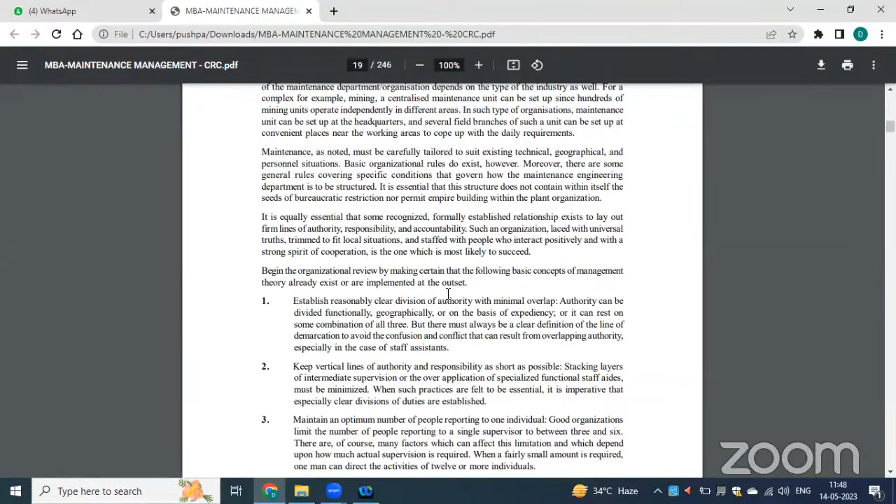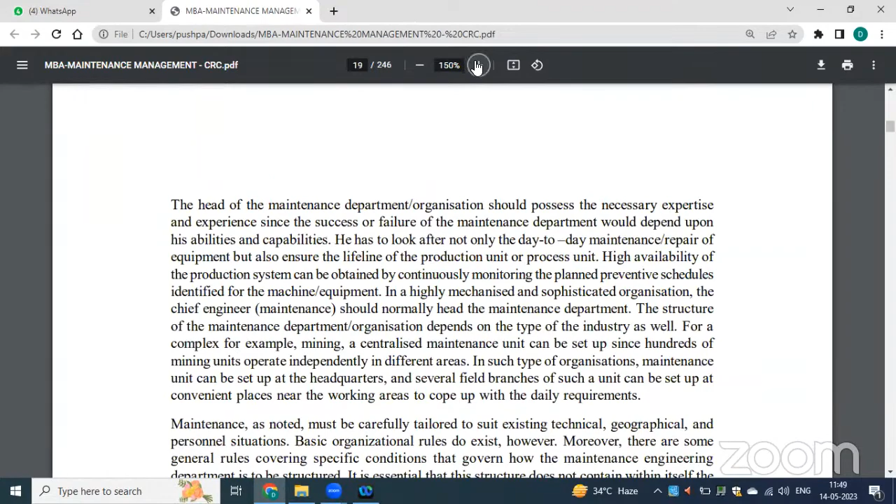So structure and strategies of maintenance management. Today we will discuss this, and we will see how the organizations are adopting this, how the organizations are taking this as a concerned area.

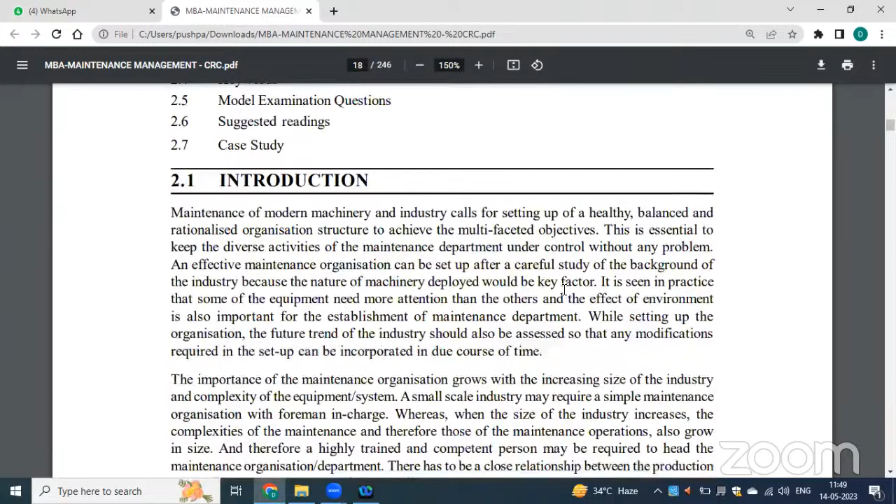Maintenance of modern machinery and industry calls for setting up a healthy, balanced, and rationalized organization structure to achieve the multifaceted objectives. Production management is also changing with the modern machinery. All machinery is being automated, and new types of technology are being introduced on a continuous basis in the organization.

So in this changing scenario, the organizations have to ensure there is a balance. They should ensure there are no breakdowns in the machinery maintenance, and they should ensure there is no hindrance in the production activity.

The importance of maintenance organization grows with the increase in complexity, when we see there are constant changes in the equipment. If you go with very traditional equipment, every month or every 15 days you grease it, you oil it, and there is no repair needed in that maintenance.

But when it is automated, we have to do the backup, we have to ensure it stays on, and we have to ensure there is no problem in the automation scenario. So it goes on a continuous basis.

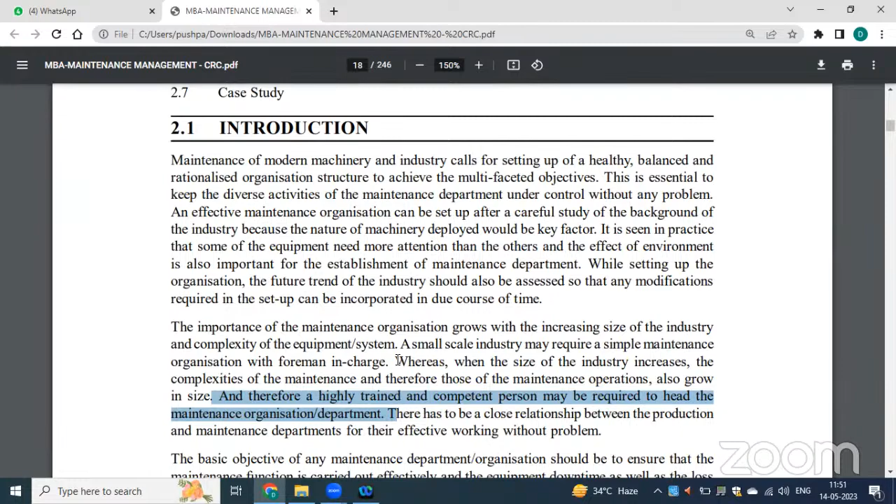So what is the basic objective? The basic objective is to ensure that the maintenance function is carried out effectively, and equipment downtime as well as loss of production is minimized. So what does downtime mean?

The machinery that has been shut down, the time involved for the machinery to be shut down - if the machinery is shut down, the production time will increase, and when production time increases, your cost will be affected.

So what is your objective? The objective is that you have to cut down the equipment downtime and increase the production capacity.

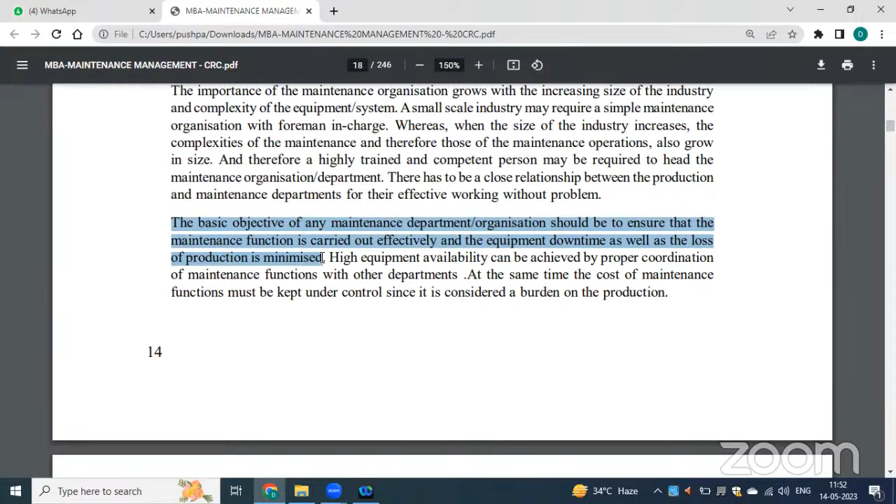So what are the requirements they look for to achieve this objective? The head of the maintenance department should always have an expertise, since the success or failure of the maintenance department depends on his abilities and capabilities. Whoever is more experienced will know when the machine will break down, when it will be under repair, and if it is under repair, how it can be recovered.

And what are the precautionary measures that have to be taken, how continuous monitoring has to be done, and how planned preventive schedules can reduce breakage in maintenance. So if we are servicing our vehicles every 15 days, it will run smoothly. These preventive schedules and monitoring can reduce repairs for any machine.

For example, he has specified mining here. A centralized maintenance unit can be set up since hundreds of mining units operate independently in different areas. We see that wherever mining operations are conducted in different areas, the whole operation is maintained at one headquarters, and the maintenance department coordinates with the daily requirements of each different area unit, successfully maintaining the operations.

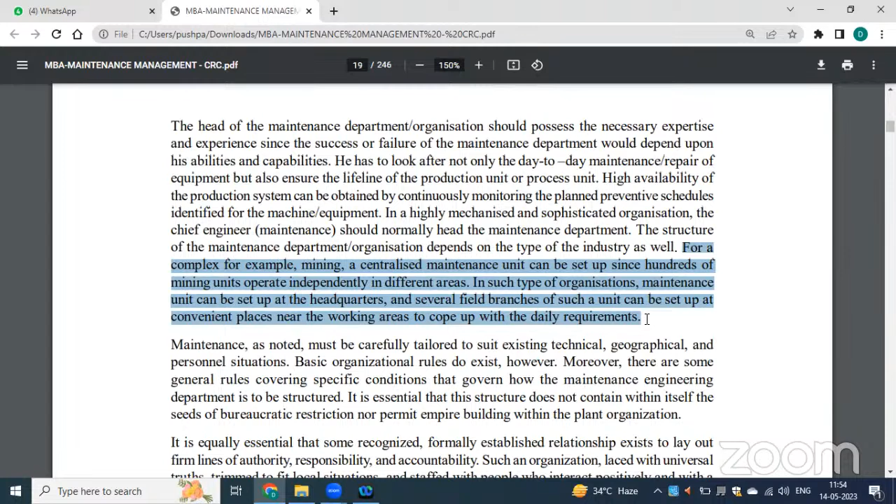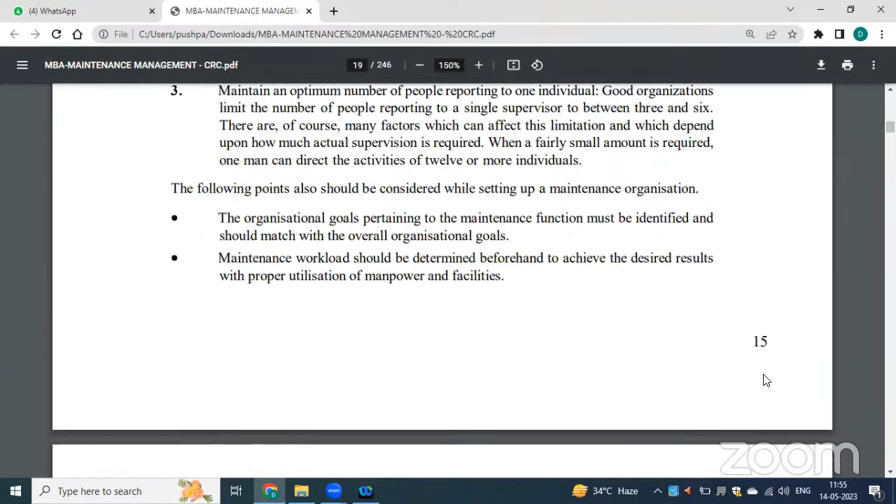Whenever the maintenance department is designing their strategy, every department has its own policies, its own procedures, its own goals. Every department tries to come out with the facilities that they are offering to each and every other department.

Coming to the maintenance organization, the organizational goals pertaining to the maintenance function must be identified and should match with overall organizational goals. So whenever they are trying to set up their goal, they have to match with the organizational goals. Suppose the organizational goal is to increase production capacity and double it within 6 months.

If that goal is there, the maintenance goal would be to ensure every month they go with repair, or coordinate with different departments to see how the machineries are running, what machineries have been down, how they have to be brought up, and how they have to be repaired. If your repairing schedule shows that a particular department's machinery comes for repair after 1 month or 15 days, that contradicts the organizational goal of doubling capacity in 6 months.

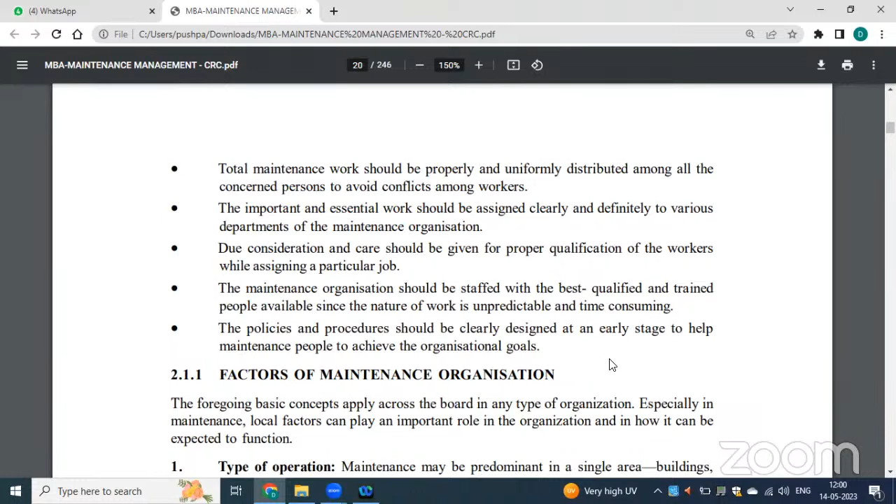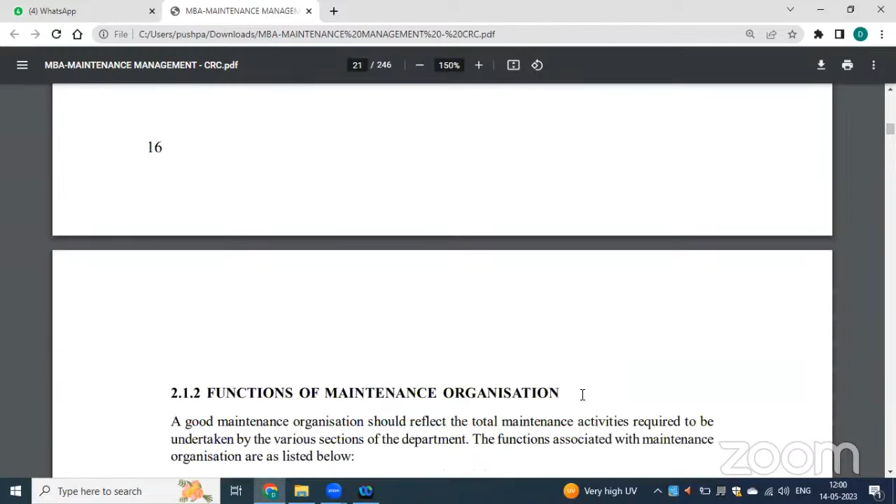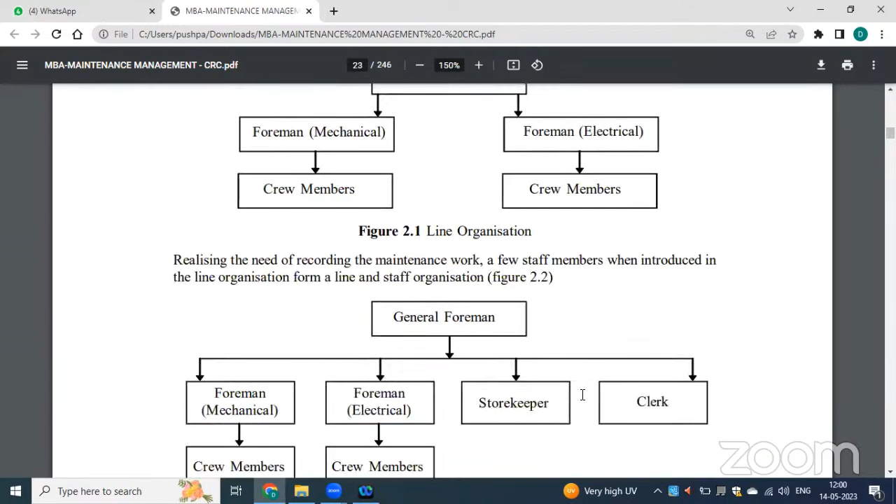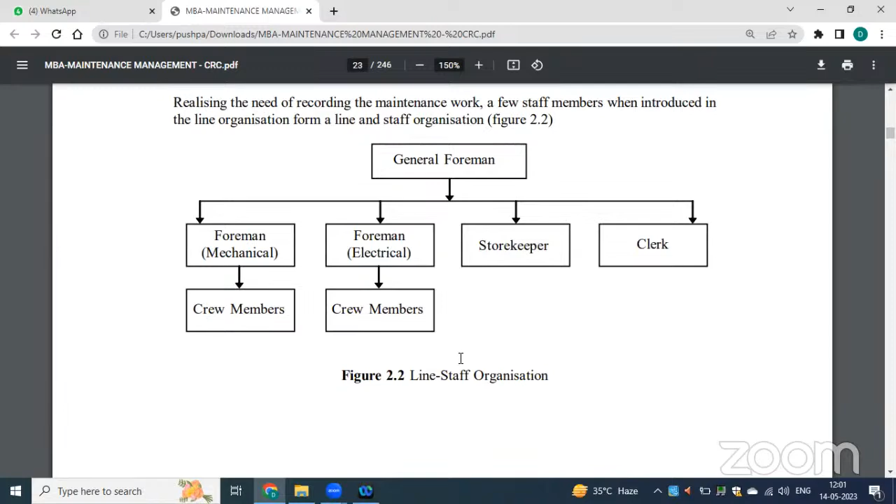Last class we discussed the structure of the maintenance organization. We have different types of structures: a line structure, and a line staff structure, wherein there will be supporting staff and a line function, with the supporting staff assisting it.

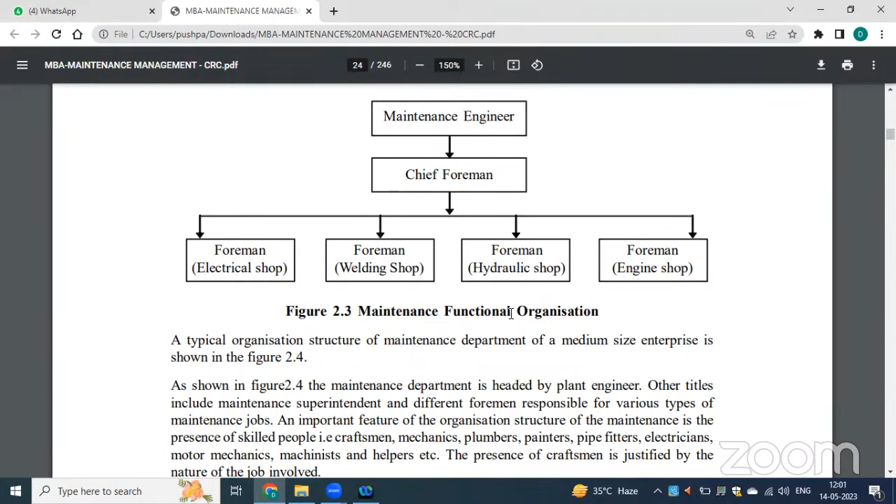Then we have seen the maintenance functional organization. Depending on the functions, like electrical functions, welding functions, hydraulic functions, engine shop, the maintenance organization is structured according to the different operations conducted in the organization.

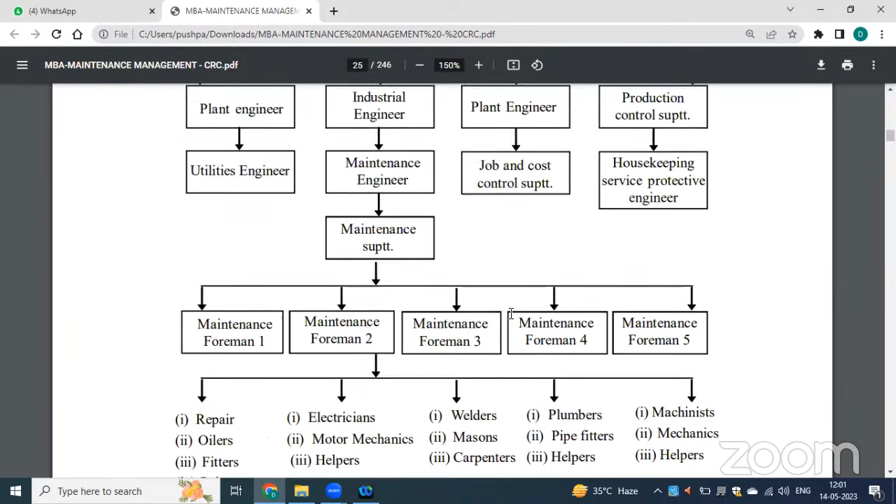Then we have seen, we have a works manager, a plant engineer, industrial engineer, production control superintendent, and a utilities engineer. These are the different designations in operations management. Under the maintenance superintendent, we have maintenance foreman one, foreman two, and foreman three, who organize the functions at different levels.

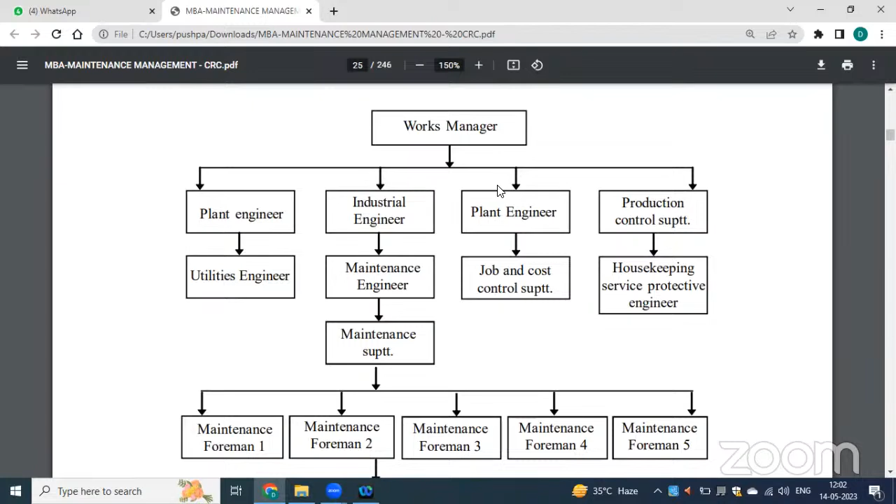One foreman takes care of repair, another of electricians - we have different categories within the maintenance department. Foreman two and foreman three will each have some category of people, and foreman four will have another category. So every foreman will have some category of people who take care of maintenance. This is how the organization structure of any maintenance department looks.

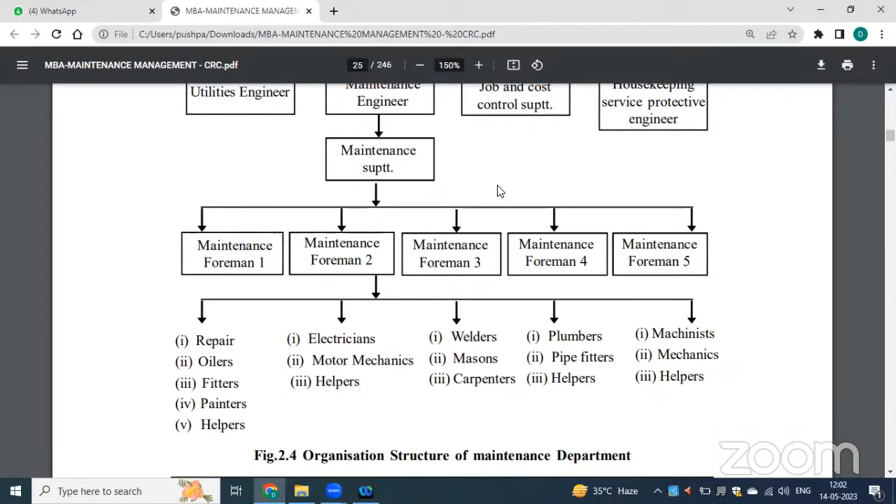Now, strategies of maintenance management. As we discussed earlier, if you see the approach - whenever I feel there is a fever or illness, in earlier days I would go to the doctor only then.

But is that the case now? You ensure your body maintenance every day - lukewarm water in the morning, a healthy breakfast, lunch and dinner, making sure your cholesterol levels don't increase. Every month, you get medical tests done to check whether you are fit or not, and based on the reports you go for doctor consultation. This way, you have changed your scenario of maintenance.

In the same way, organizations earlier used to have the maintenance department become active only when there was a breakdown. But now there is a change in scenario where they are active all the time, focusing more on preventive maintenance than post maintenance - that is, developing techniques or methodologies to reduce breakdowns.

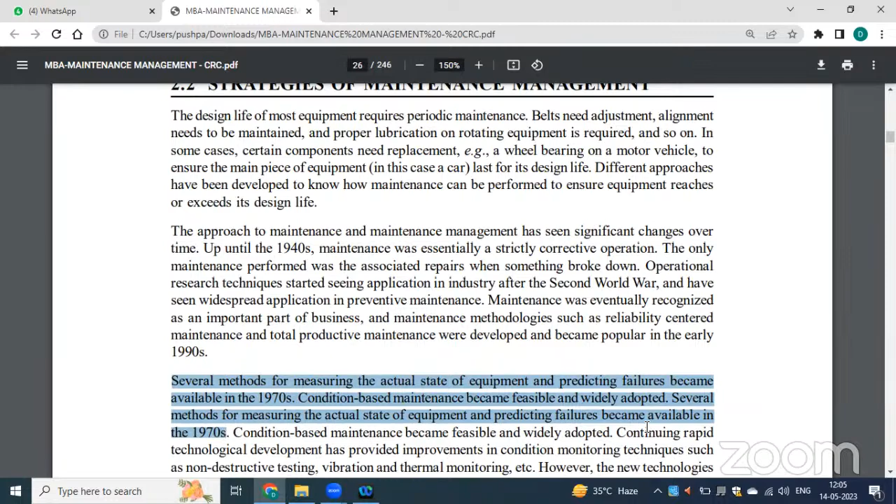Then in the 1970s, condition-based maintenance became feasible. Several methods for measuring the actual state of equipment and predicting failures became available - non-destructive testing, vibration and thermal monitoring. These condition monitoring techniques were used to check whether the machinery was working well or not. That was the strategy in the 1970s.

Now, in the 1990s, reliability centered maintenance and total productive maintenance were developed and became popular in the early 1990s.

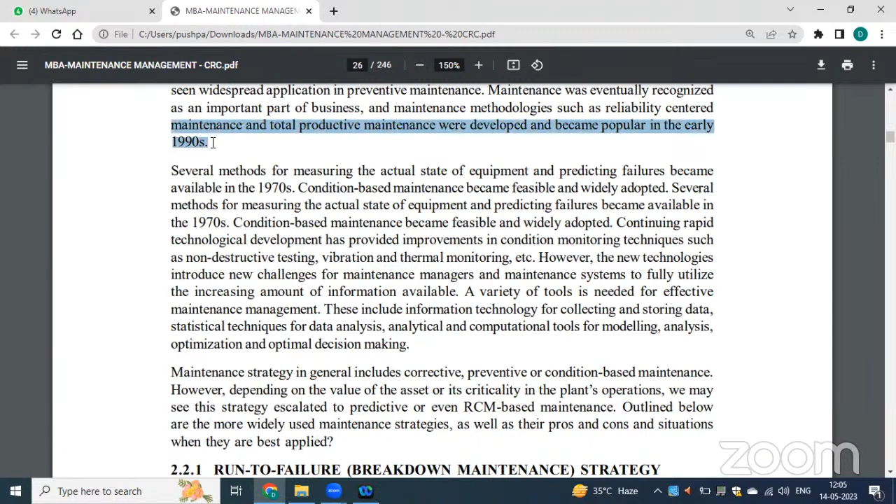So what are the different strategies? This may be the question that can be asked in your examination. What are the different strategies that the maintenance department designs for?

So first strategy is run to failure, also known as breakdown maintenance strategy. What happens in run to failure? Assets are deliberately allowed to operate until they break down, at which point maintenance is performed.

So what happens is this is a strategy where if the machine breaks down, only then we will do some appropriate measure. Until then, we are not taking care of that particular machinery. No maintenance is performed before then, until there is a shutdown in the machinery. After that only we will perform maintenance; before that, we will not do any activity.

A plan is put in place ahead of failure, so the asset can be fixed without causing production issues. This type of maintenance strategy is used when an organization uses redundant, non-critical assets that pose no safety risks, and the total cost of repairs after breakdown is less than the cost of performing maintenance beforehand.

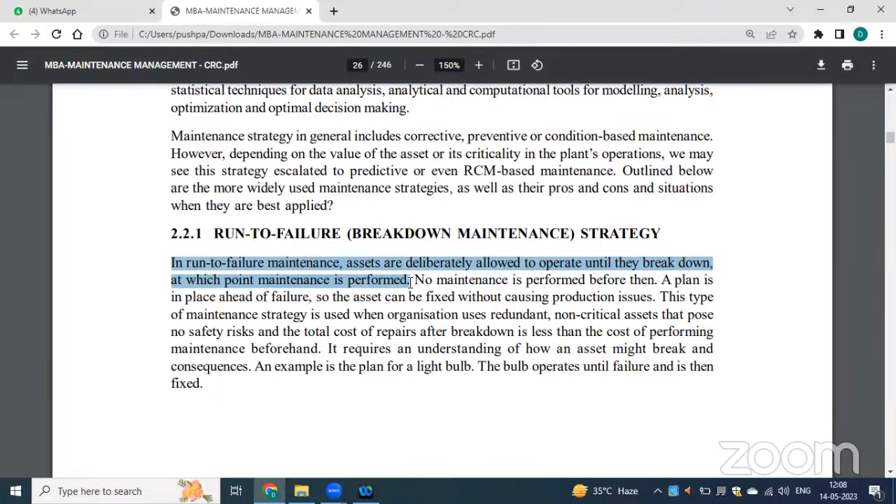So what are the advantages? Minimum time spent planning and maintaining, and simplicity of implementation.

Disadvantages: unpredictable and inconsistent maintenance tasks. We don't know when it will break down and when we have to be active. If you are involved in any other task at that time, it will be a problem. So there are higher maintenance and inventory costs.

We have to always spare or allocate some inventory for that particular machine for maintenance, so we are involved in high maintenance and inventory costs. These are the disadvantages.

Next strategy is the preventive maintenance strategy. In this strategy, before the machinery fails, you have to react. So you should be proactive.

In preventive maintenance, maintenance is regularly performed on an asset to reduce the likelihood of its failing. You are trying to maintain the asset to reduce its likelihood of failing. It is performed while the asset is still working, so we schedule our maintenance operations whenever the asset is in working condition.

This should be used on assets that have critical operation functions. We use this strategy when we see that the asset has a critical operation function, regular maintenance is required, and proper care must be taken because it is more and more important for production activity.

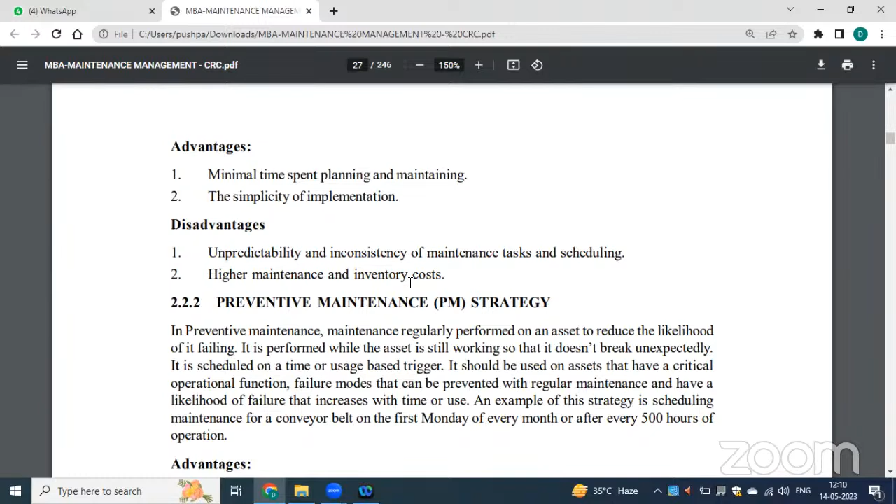An example of this strategy is scheduling maintenance for a conveyor belt on the first Monday of every month, or every 500 hours of operation. You just keep one date, say every Tuesday, to monitor the operations of that machinery, or after every 500 or 300 hours you have a check. Then automatically your maintenance department will be more effective and you will reduce overhead costs.

Advantages: lower overhead costs, time commitments, and production delays. Production delays can be decreased because there will be no repairs in the machinery on a continuous basis.

Disadvantages: investing more time and resources. Even when the problem is not there, you have to always invest some resources to maintain the system.

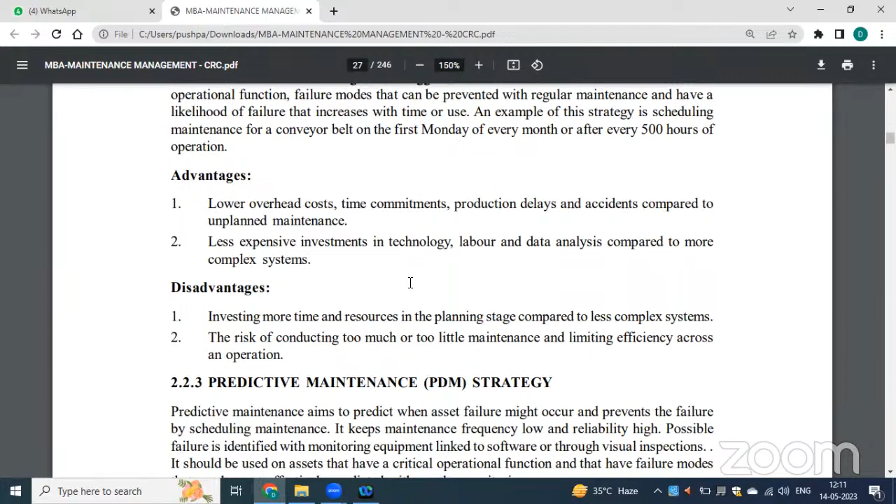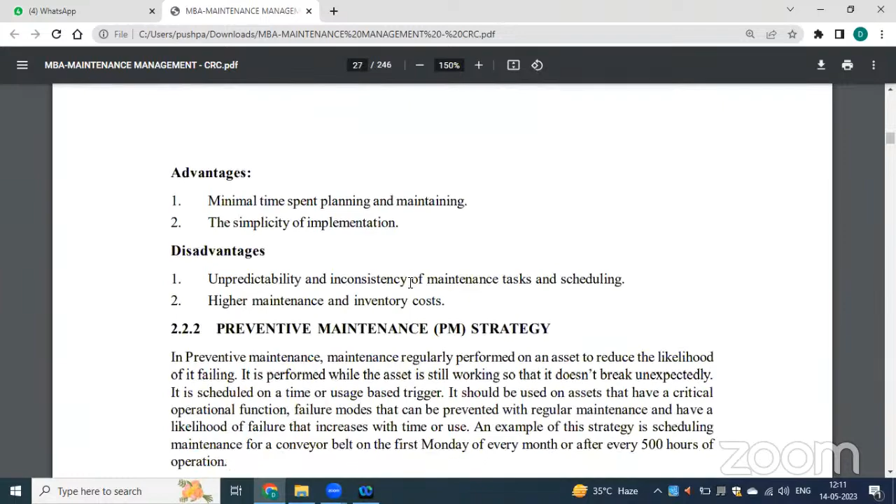Predictive maintenance strategy. Earlier we had preventive, run to failure, and preventive strategies. Predictive means you are predicting that the machinery may fail. You assume that your asset may fail, and you design strategies for preventing the failure by scheduling maintenance.

This keeps maintenance frequency low and reliability high. Possible failures are identified with monitoring equipment linked to software, or through visual inspections. If you are going for automation, software breakdowns may happen, or there are bugs that have to be fixed, or inspections done continuously, and you try to predict that a problem exists and it may cause a breakdown.

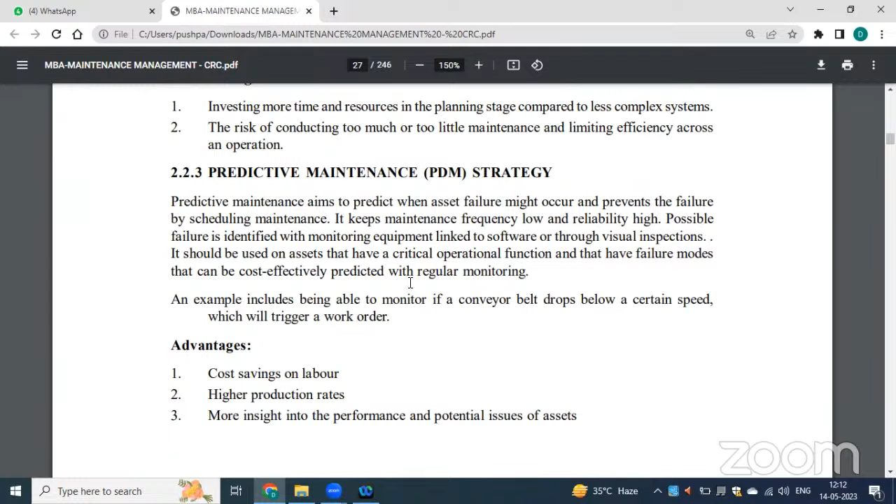An example includes being able to monitor if a conveyor belt drops below a certain speed, which will trigger a work order. So here, with predictive maintenance, you try to predict and react.

Then there's routine maintenance. Apart from this, you always have to do some routine maintenance for any asset to work well. Routine maintenance is the regular inspection and servicing of the machine, always conducted by maintenance management, ensuring that operations run smoothly. Routine maintenance tasks are small and simple in nature, requiring only basic maintenance skills to perform.

These tasks can be conducted daily, weekly, monthly, quarterly, or annually. Routine maintenance is also a type of preventive maintenance, and is a key part of total productive maintenance, in which machine operators perform small maintenance tasks to increase the reliability of the machines they use every day.

Examples include lubricating machines with oil and grease, cleaning any wastage material that gets stuck, adjusting machines, replacing equipment parts on a schedule, and inspecting certain components. These are the activities done on a routine basis, included in regular inspection.

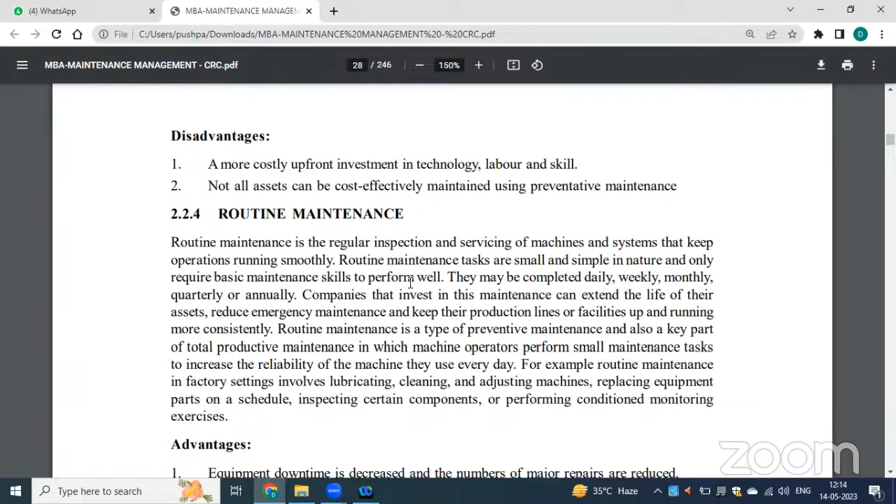Then you have the corrective maintenance strategy. The use of planned preventive maintenance brings out the nature of repetitive failures. When such repetitive failures occur, whenever a repair is needed, you have to ensure corrective maintenance is done. Corrective maintenance may be defined as a specific maintenance operation which is well organized and performed with prior planning.

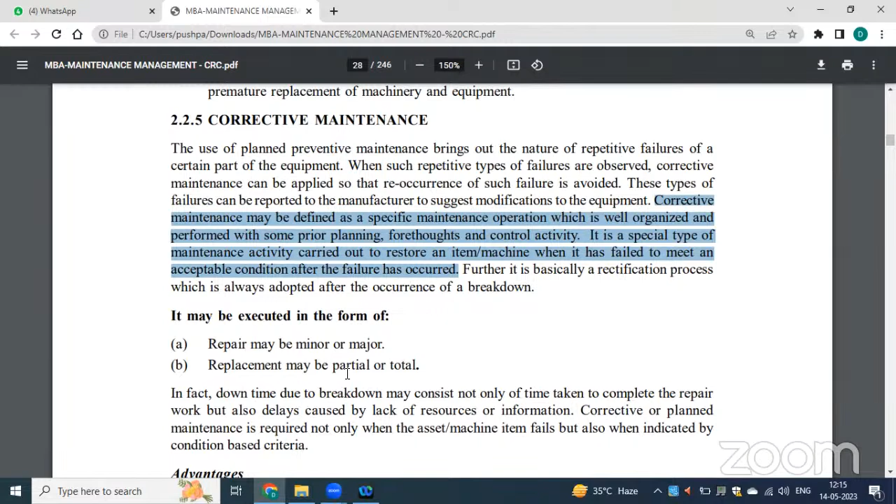It is performed with forethought and control activities. It's a special type of maintenance carried out to restore an item or machine when it has failed to meet an acceptable condition, after the failure has occurred. It may be executed in the form of minor repair or partial replacement. In that scenario, you have to ensure you take a corrective action.

Then there's the reliability centered maintenance strategy, known as RCM. It is a highly involved process that seeks to analyze all possible failure modes for each piece of equipment and customize a maintenance strategy for each individual machine. You have to ensure the machine is reliable, and from an overall perspective, determine the different failure modes for each piece of equipment and customize your strategy accordingly.

RCM establishes the functional requirements and the desired performance standards of equipment, which are then related to the design and inherent reliability parameters of the machine. RCM means reliability centered — your main objective is reliability.

Whenever you want to be reliable, you have to see things from an overall perspective, analyze all possible failure modes, and customize your maintenance strategy according to the failure you expect might happen.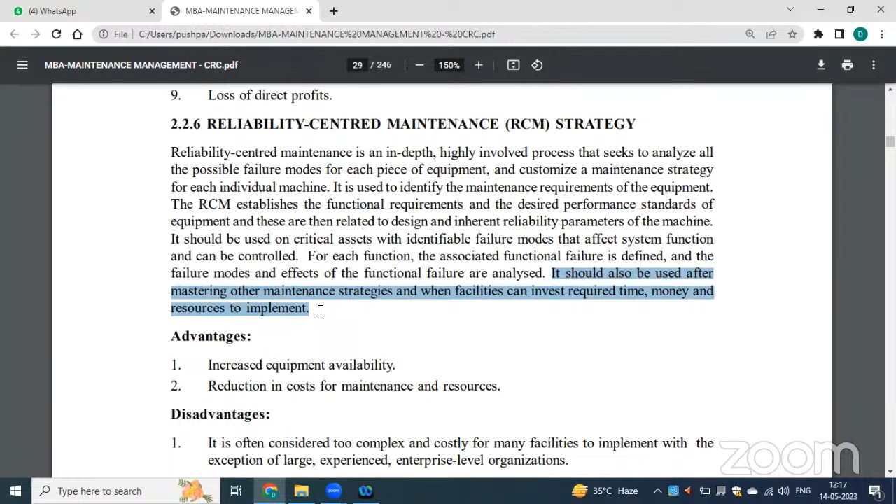Condition based maintenance strategy: based on the condition of a particular machine, you design your maintenance strategy. It measures operational parameters to determine changes in condition, performing maintenance only when the need arises — based solely on the condition of the machinery.

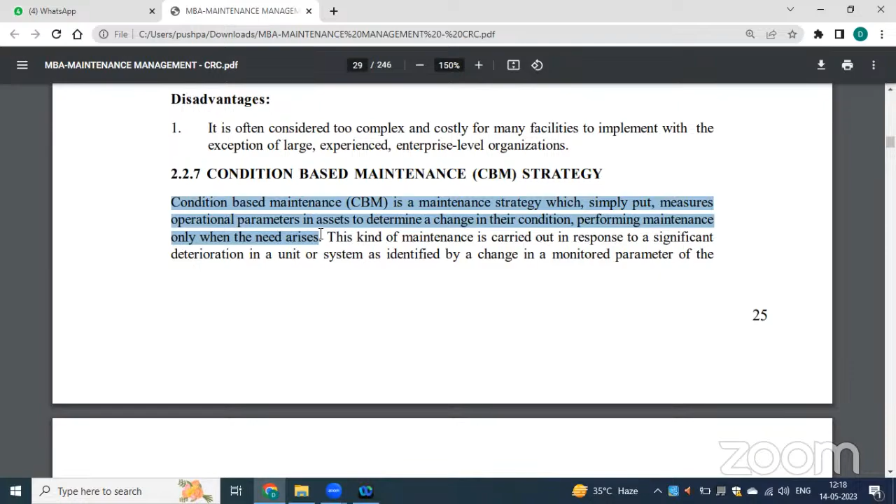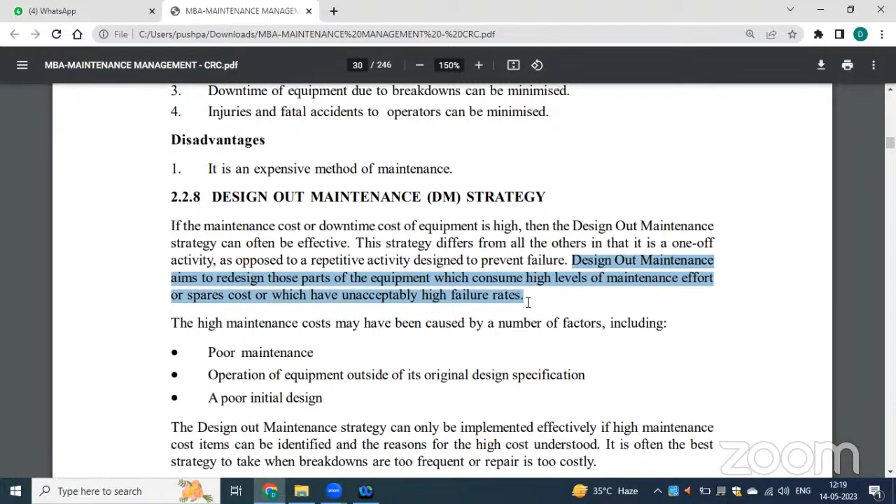Then design out maintenance strategy. If the maintenance costs or downtime costs of equipment is high, then you design this strategy, design out maintenance strategy. This strategy is different from others, and it is redesigned for those parts of equipment which consume high levels of maintenance efforts. So you try to sort out a design strategy wherein you see which equipment requires high maintenance cost and which equipment requires less maintenance cost, and based on that you design these strategies.

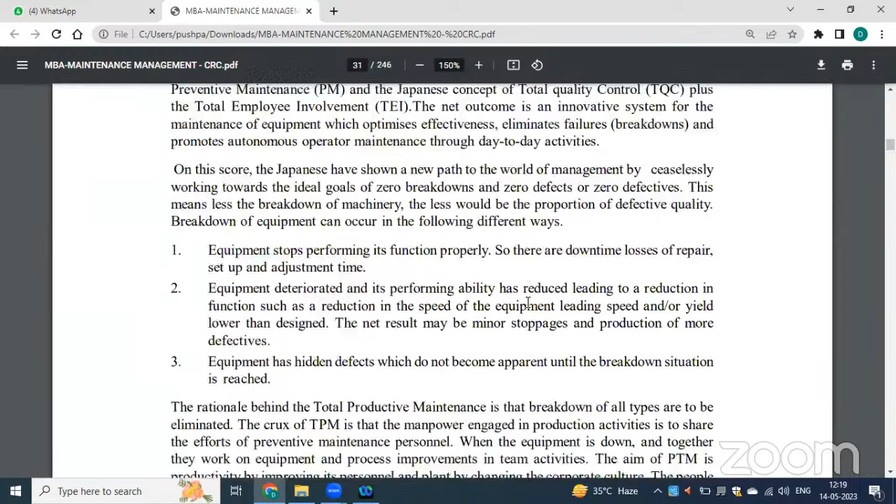Total predictive productive maintenance. So these are the different strategies that organizations plan for. So what are the strategies? Let us see.

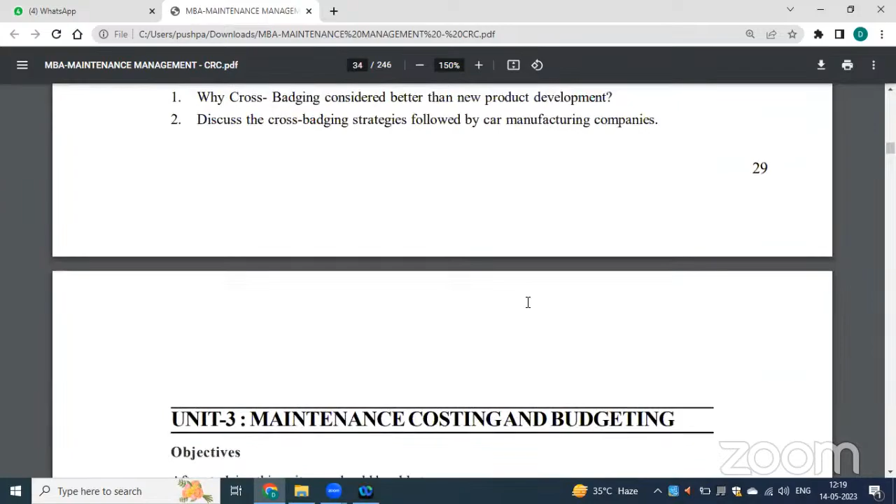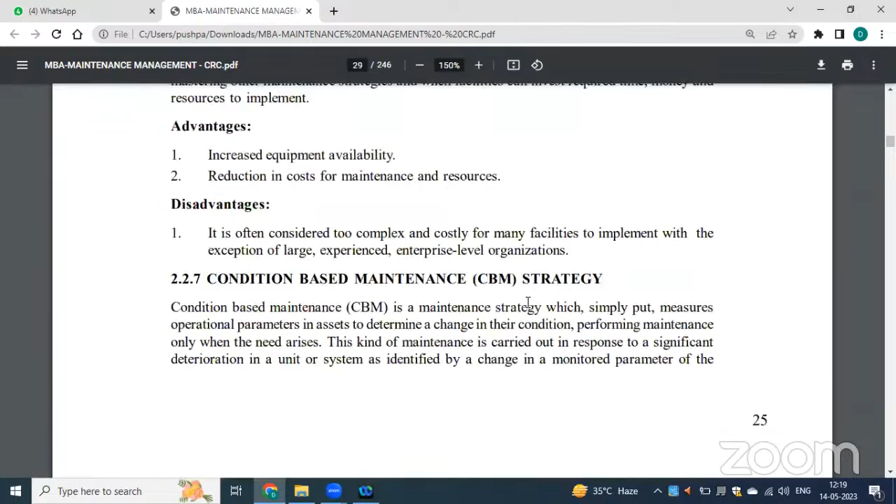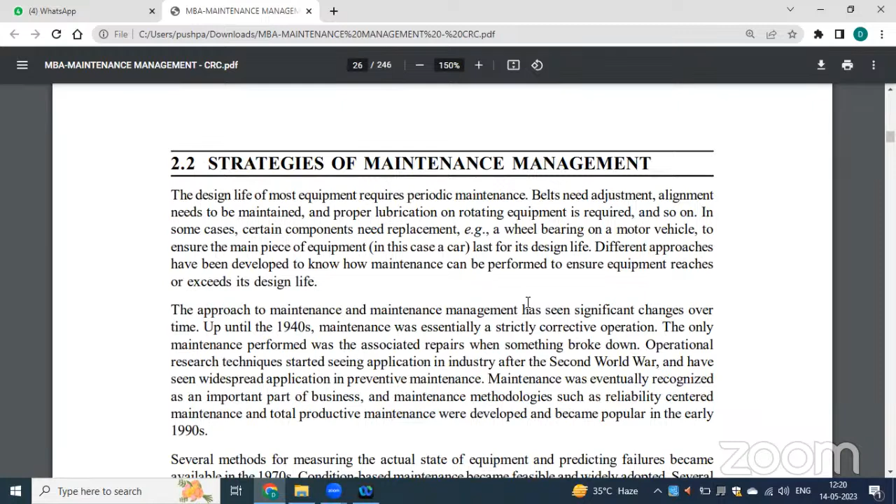Let us once again go through the strategies and then we will wind up for the class of today. So what are the strategies? It is a very important question that can be asked in your examination. So what is a strategy? It is a plan, or a future course of action that we are planning to do. So we have different types of strategies.

One is run to failure, RTF. Whenever there is a failure, until then you perform no maintenance operations on that. Preventive, you try to design some activities to prevent the breakdown of the machinery. That is known as preventive maintenance strategy.

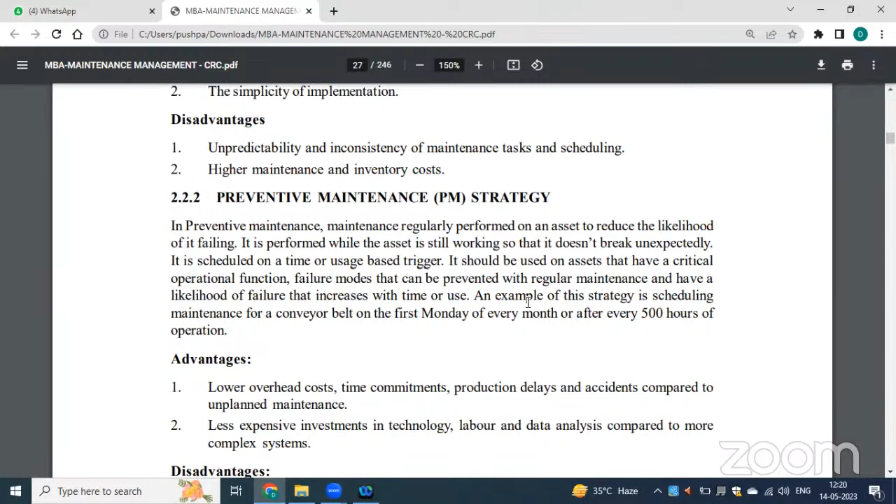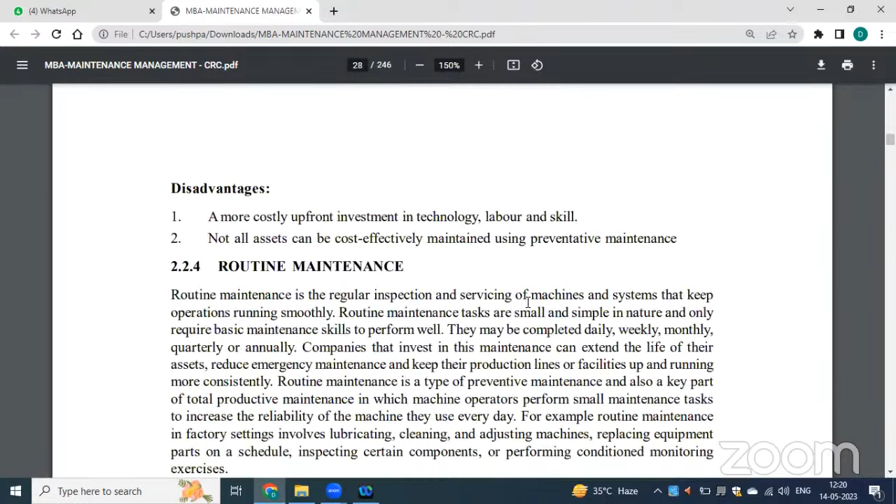Next is predictive. So you are trying to predict, and based on the prediction, you are trying to schedule your maintenance activities. Routine maintenance strategy, that is you are trying to design your strategy according to the needs that you have to do on a regular basis.

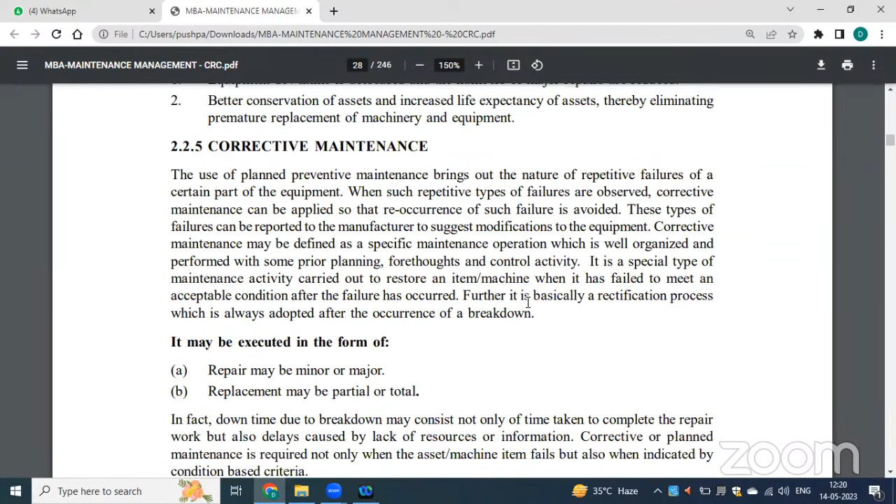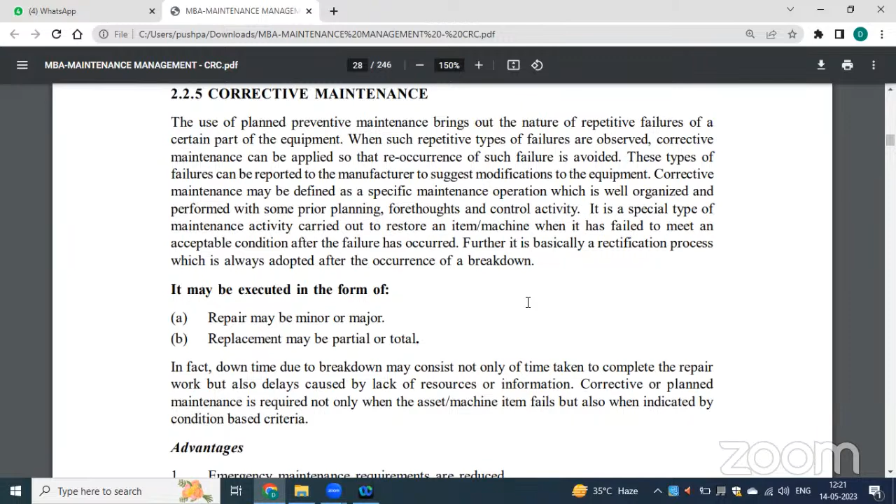Corrective maintenance, whenever there is a requirement of maintenance, you ensure that you are not doing maintenance only for namesake, and you are doing some corrective operations so that your item is being restored.

Reliability centered, you try to customize your maintenance strategies wherein you try to see, from an overall perspective, what are the failure modes, and according to that you are designing your reliability centered machine maintenance strategy.

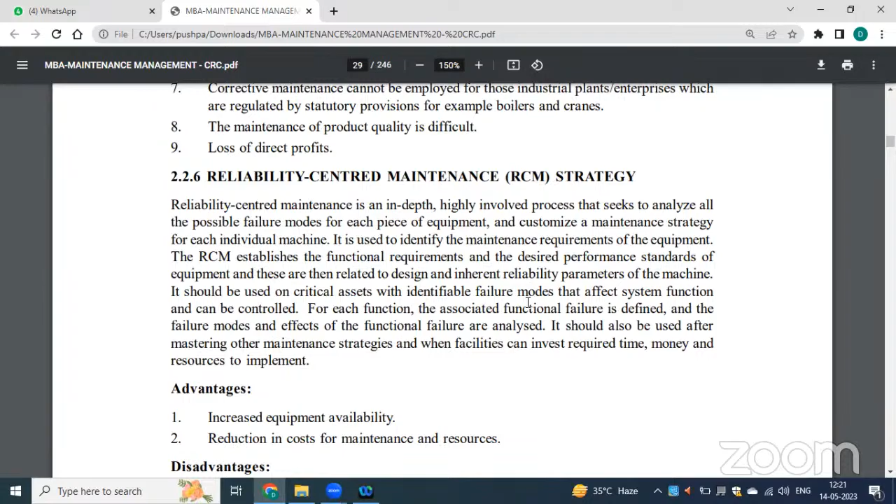Then design out maintenance strategy, you try to design out your strategies based on those types of equipment which require a high level of maintenance, and those equipments which require a minimum level of maintenance.

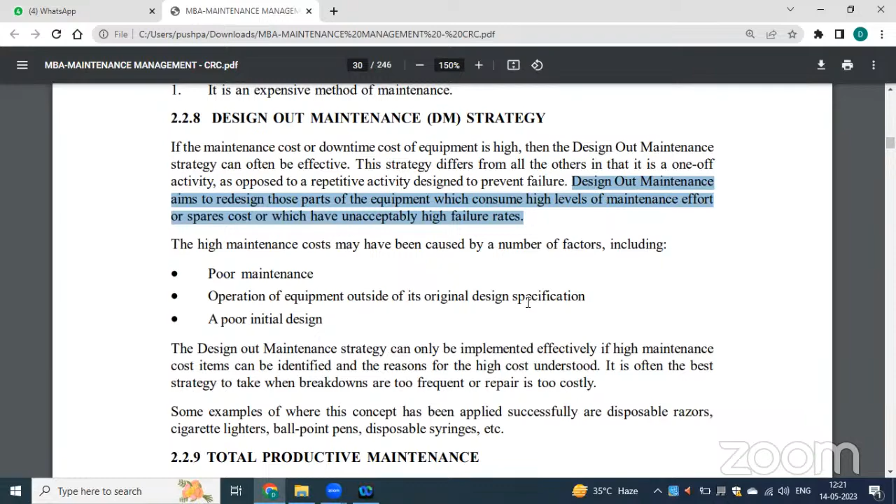Total productive maintenance, it's an overall maintenance package wherein you try to see that all the strategies are being integrated, and you aim for zero breakdown and a more acceptable cost benefit ratio.

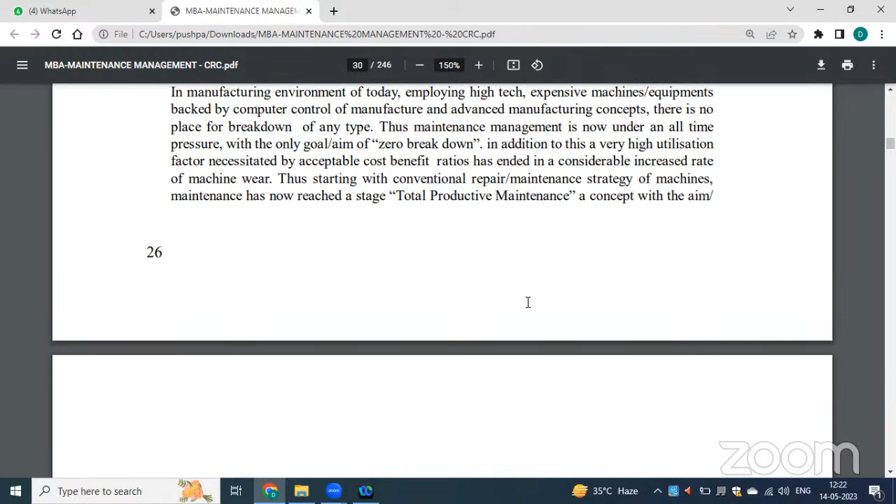So world-class manufacturing is an innovative, non-traditional approach to plant maintenance and is complementary with TQM, JIT, total employee involvement, and continuous performance improvement. As you are also having a subject world-class manufacturing, it is an innovative approach for this maintenance management.

So total productive maintenance approach has the capability of almost seamless integration. Seamless integration means without any hindrance or without any problems.

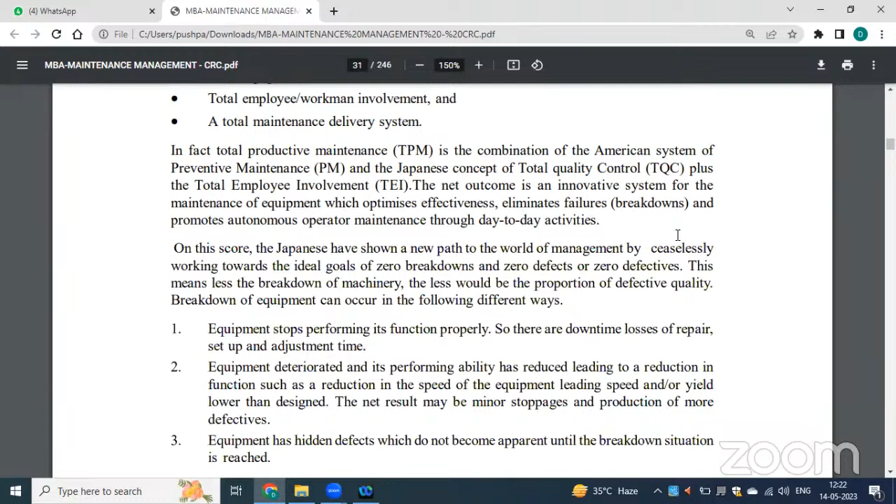So TPM means total equipment machine effectiveness, total employee workman involvement, a total maintenance delivery system. That is known as TPM. TPM is a combination of PM, that is preventive maintenance, the Japanese concept of total quality control, and the total employee involvement. So TPM is a combination of PM, TQC and TEI.

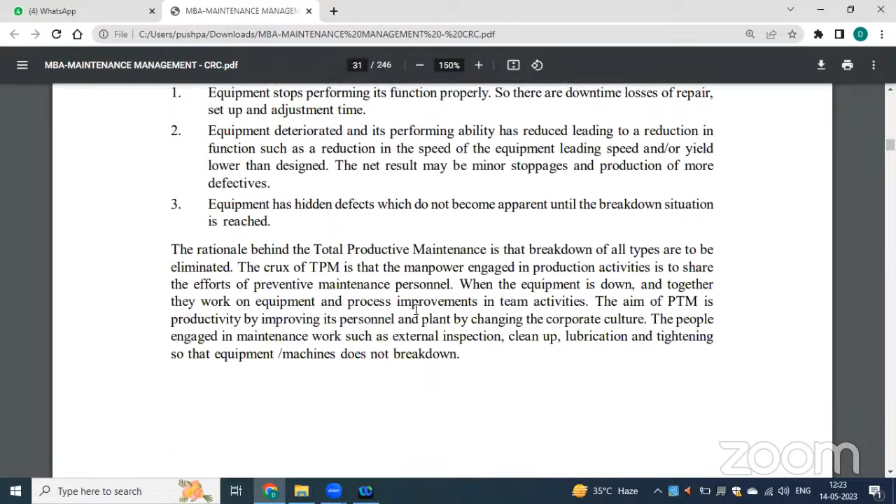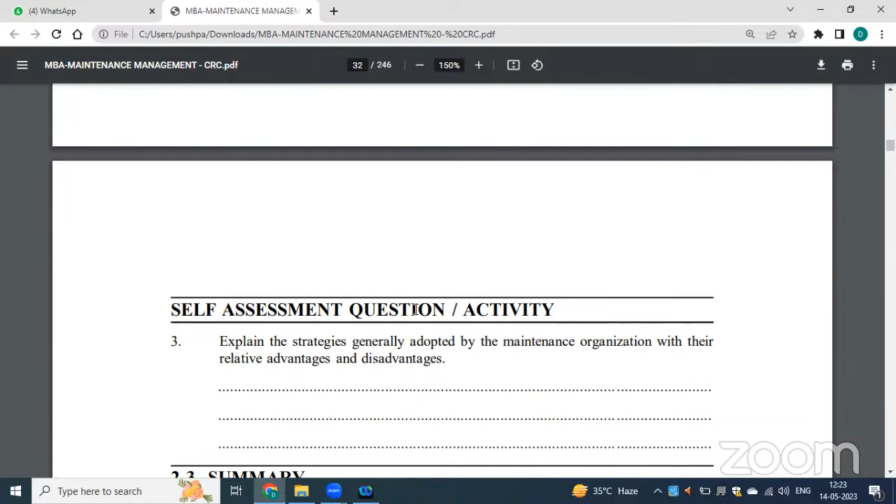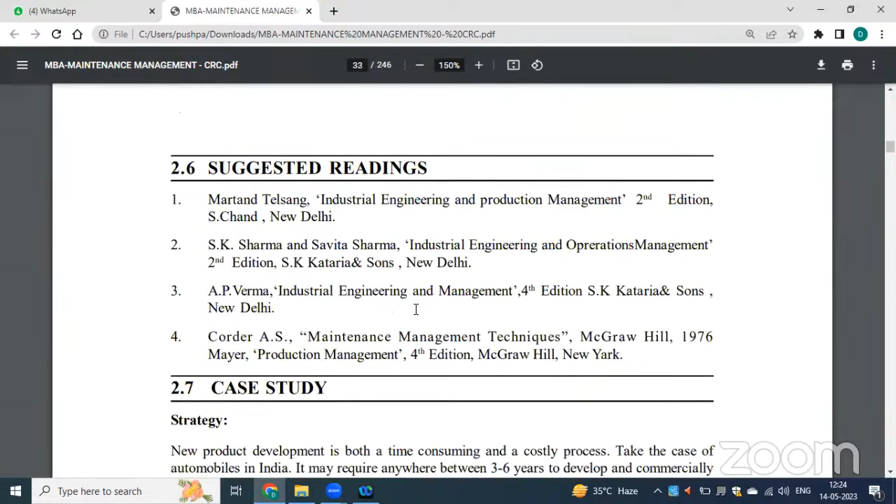So we have discussed today all the strategies. You should now try to browse some strategies of organizations to see how new organizations are using these strategies and how they are implementing them on a regular basis. Come out with your own examples and relate them with the advantages and disadvantages organizations have with these types of strategies. You can also go through the case study provided, on how they design their strategies when going for new product development.